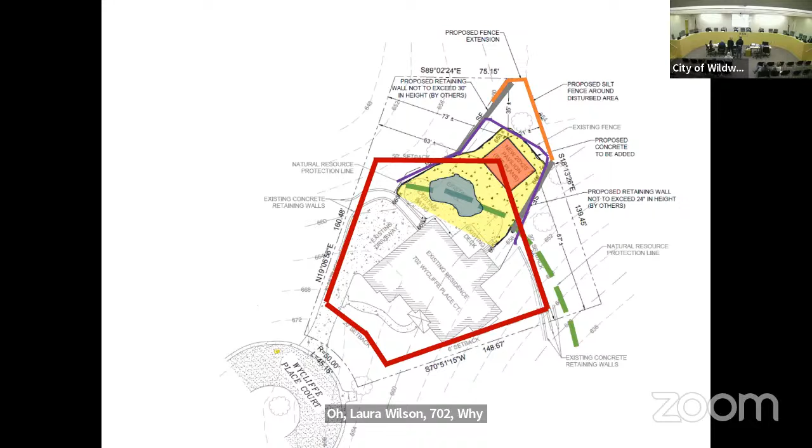Do you solemnly swear that the testimony you're about to give in this cause will be the truth, the whole truth... Just a moment, Courtney.

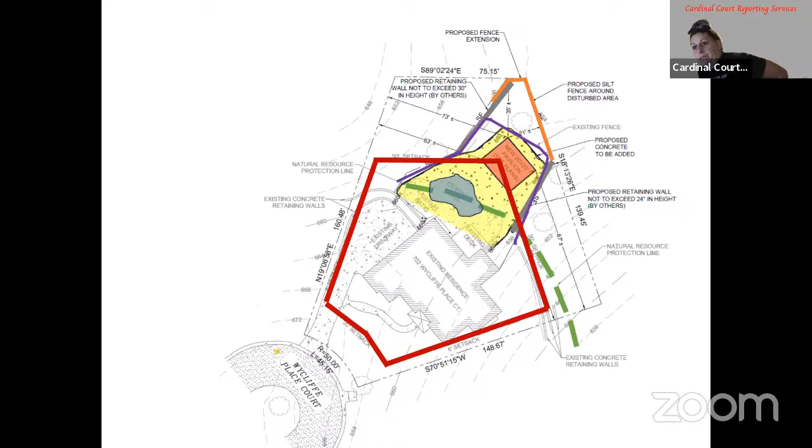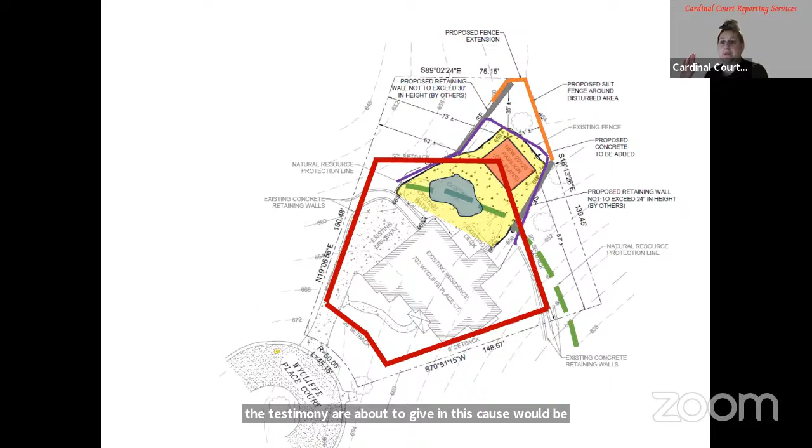Courtney, you should be good to go. Can you hear me? Can you hear me okay? Yes, we can. Please raise your hand. Do you solemnly swear that the testimony you're about to give in this cause will be the truth, the whole truth, and nothing but the truth? Yes, I do. Yes, I do. Thank you.

Mr. and Mrs. Wilson, if you could please explain the nature of the request and the hardship or practical difficulty necessitating the variance as it relates to the character of the property only. Yes, sir. I was wondering, these are some pictures that I took this morning that I was wondering if I could hand out to you all up there, as well. Thank you. And then also on the back of the photos are some letters from some of our neighbors that they sent along as well.

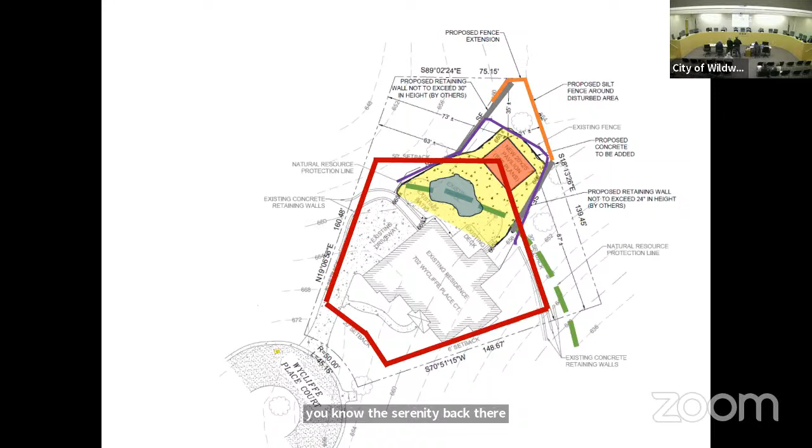Basically, Laura and I have lived in Wildwood for over 30 years. We lived off of Clayton Road in Clayton Spur Court subdivision for about 10, 12 years, and we were the first builders in Wycliffe. The reason we chose this lot was because of the beauty, the woods, the serenity back there, and the privacy. But over the years our family has grown, and we've kind of outgrown our pool deck, and it's really become kind of a safety issue as well.

And we're wanting to redesign the pool area and the pool deck. As you see in the photo here, this is the backyard from this morning; I took these pictures. We are actually not wanting to extend outside of the fence that you see here. We are wanting to keep everything within the fence that is existing right now. The plans you see up here, I believe, were the first previous ones that we had put up with our contractor. Since then we have changed that. I apologize, and if you think it would be best for us to prolong this to the next meeting, to get a new plan drawn out, we can do that if you think that would benefit us as well.

But basically, the stones you see on the pool area here, that's a water fountain, and it's eroding. We're wanting to get rid of that whole area right there, and we're wanting to get rid of the landscape around the pool. We're wanting to move our pool deck, put pool decking around the pool to make our pool deck bigger. And then right behind there, kind of where you see where we used to have our trampoline for the kids when they were younger, that's where we're wanting to put the pavilion, is back there. It's the flattest part of our yard.

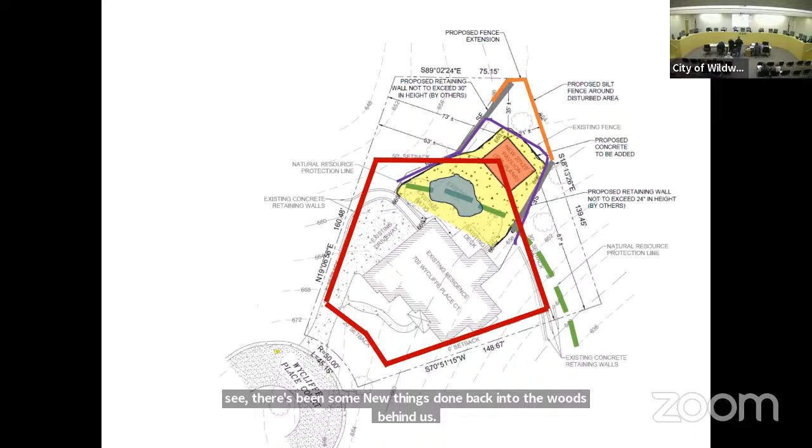As you can see, there's been some new things done back into the woods behind us as well. With this plan, we plan on having a professional drainage company come in to give us the best drainage possible for this project, because that's the last thing we want is erosion. We don't want to cause any difficulties for anybody. We want to make this for our family to enjoy for a very long time.

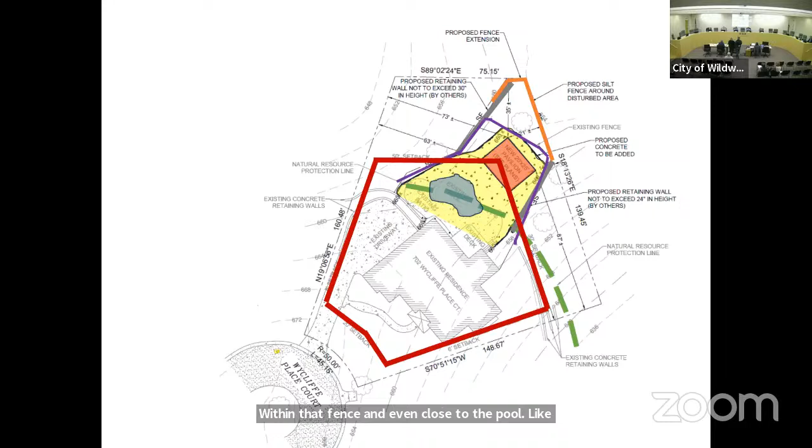So here, the other thing that was not correct is we aren't planning on doing any retaining walls. That pavilion, however it looks, can be within that fence and even close to the pool. We'll do whatever to be able to expand behind the pool, because I wish we had a picture of how much decking we have towards the house. It's not really much at all. So there would be no retaining walls and we would not move the fence.

Interestingly enough, 18 years ago, us being here, I didn't realize it was the natural resource protection line. I thought it was a building line we were dealing with. It evidently was, so you can see it going there. We had no idea that there was a natural resource line. We thought the whole time when we came up for the first time that it was on the actual building line, the boundary line. Not the natural resource line.

But if you do look at this picture, it's disturbing absolutely nothing. We've looked at, with the contractors, a lot of different options. If you go to either side, it drops off considerably. I don't know if you all are familiar with this subdivision, but it's very steep in certain parts. So there really isn't any other place to do it. If there were, we would love to.

Yeah, we're open for suggestions too on this project. And the reason I brought an extension possibly too, we would love you all to come out and see it, to see what it would look like and kind of envision it for yourselves, to see that it's really going to be within our yard here in the whole fence, and it's not going to intrude on the wildlife and the woods behind us. Also, the house behind us, you kind of see where they've done their little thing, but you can't see, there's no one else. No one at all, which is the beauty of it.

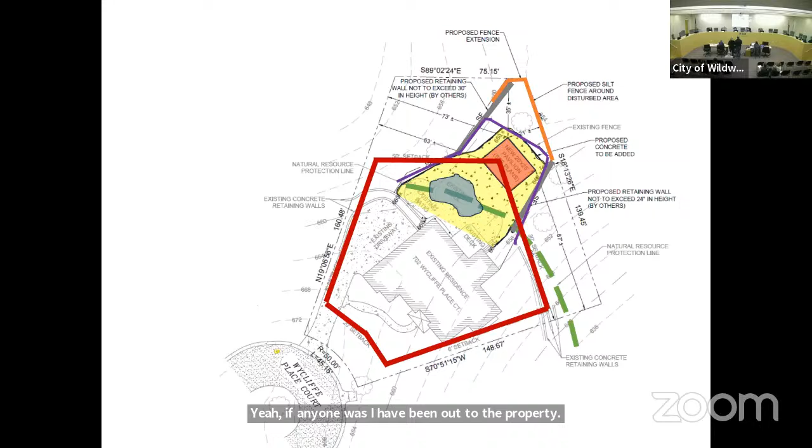Would you, so do you all think that any of you would come out and look at it, and look at the property to see it with eyes on? Yeah, if anyone was... I have been out to the property, and I think I would encourage anyone to go see it. It's a little definitely different than what you see up here, and even in the picture.

One last question. Do we need to sign up for the next meeting, or will it happen automatically? We have a wonderful department that will guide you all. Thank you, good night. Yes, thank you, Ms. Wilson. Keefe will take care of that post haste and does it well.

Mr. Lux, I'll make a formal motion to postpone till the next meeting. Mr. Lux has made a formal motion to postpone to next meeting. Is there a second? I'll second. Thank you, Mr. Sprunger. Mr. Morris, how do you vote? Mr. Lux, Approved. Mr. Sprunger, Yes. Mr. Lee? And I vote yes as well to postpone this to the March meeting.

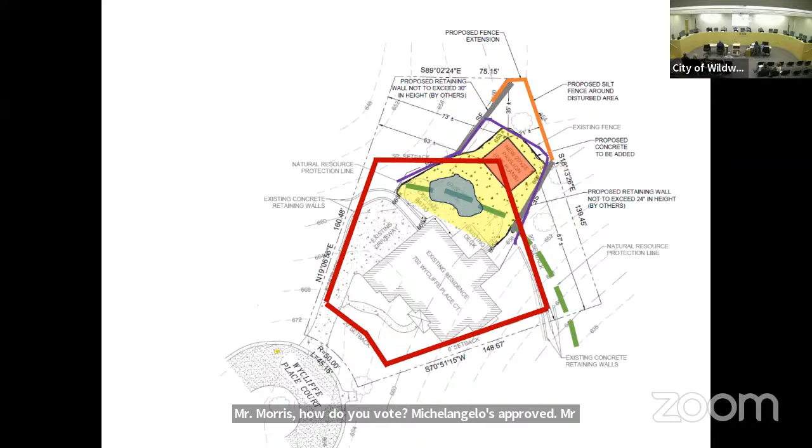At this time, we'll move right along to the next petition. Will the department please go ahead with the next petition? And again, to the board members, the director apologizes, as nobody appreciates a postponement, but I think in this particular instance we can obviously get better information and give you something that you can work from.

Thank you. The next item is BA 3-24 Whalen Custom Homes, Inc., 338 South Kirkwood Road, St. Louis, Missouri, 63122, care of Mark Doring, Doring Engineering Incorporated, 4850 Lemay Ferry Road, St. Louis, Missouri, 63129. Request an exception to the minimum yard requirements generally for the purpose of retaining a covered porch, such being upon a property located at 2644 Center Avenue, locator number 24V510034, Wesley Parc Subdivision, Lot 4, which would authorize a front yard setback distance of 19 feet in lieu of the required 20 feet. This request is contrary to the requirements of Chapter 415.140 R3 10,000 square foot resident district regulations of the City of Wildwood zoning ordinance and ordinance number 2706 approved by the City Council on June 13th, 2022. This particular property is located in Ward 8.

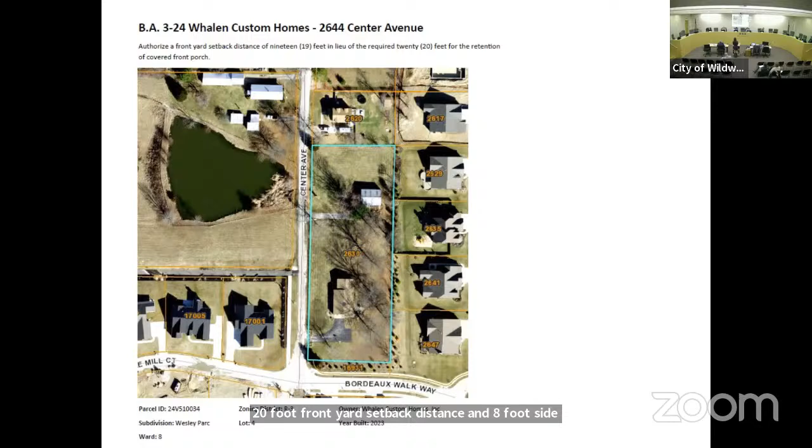That district requires a 20-foot front yard setback distance, an 8-foot side yard setback distance, and a 30-foot rear yard setback distance. The lot is fairly level. In this oval in front of you is the subject of this variance request. This front facade feature of this residence is at 19 feet presently, in lieu of the 20-foot setback required for front yard setbacks in the zoning district.

The petitioner is seeking a variance permitting this 19-foot front yard setback distance. This variance would preserve this front yard improvement as it stands today, rather than forcing demolition or partial removal of it. The applicant notes that this encroachment was caused in part by a misunderstanding of the extent of the new right-of-way associated with the lot. The city recently accepted Center Avenue for maintenance after gaining approval from 21 separate holders of right. This road will be completed or improved in the near future with plans soon to be completed.

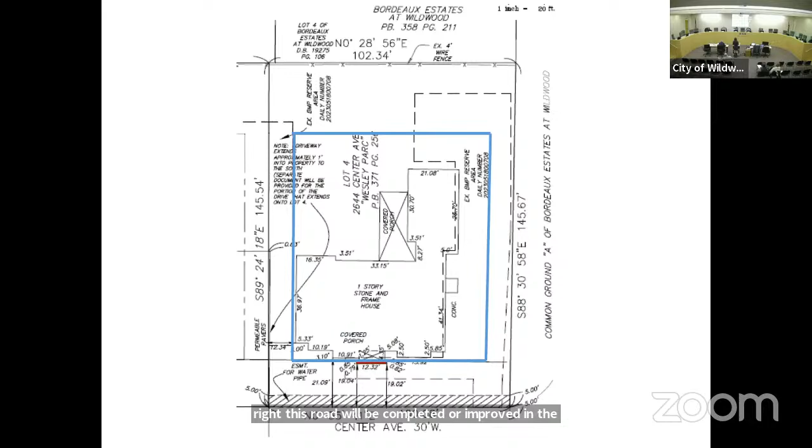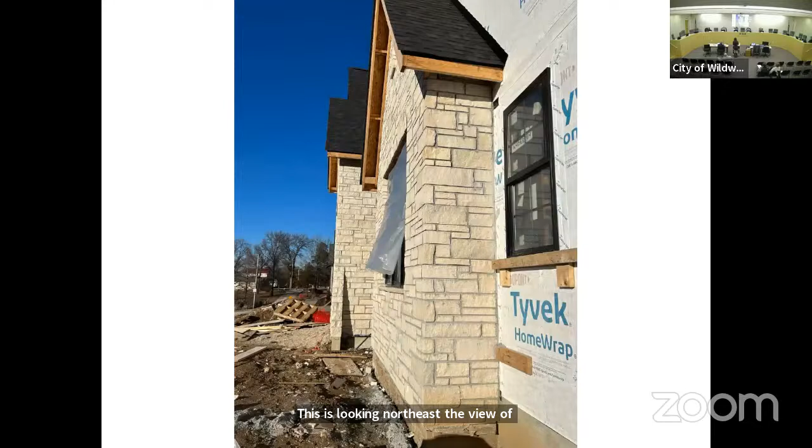This is looking northeast, the view of this front facade improvement. This is looking north of that facade improvement. This is looking north at the street, this is Center Avenue. This is looking southwest at the house across the street. This is looking east, and this is the southern facade of the home. And this is looking southwest where Center Avenue intersects with Bordeaux Walk Way. This is the view of the dwelling in relation to the residence next to it, which you may remember from a very similar variance request in December 2023.

This concludes my presentation. If you have any questions at this time, Director Vujnich and I are available to answer them. Thank you, Ms. Keefe. At this time, will the petitioner please come forward, state his or her name, address, relation to the property, and we'll get you sworn in by the court reporter.

Good evening. I'm Mark Doring, President of Doring Engineering, 4850 Lemay Ferry, St. Louis, Missouri, the engineer in relation to the property.

I'm Jennifer Whalen Bartley with Whalen Custom Homes, representing Mike Whalen, who has laryngitis, in relation to the property. I'm with the developer, with the builder.

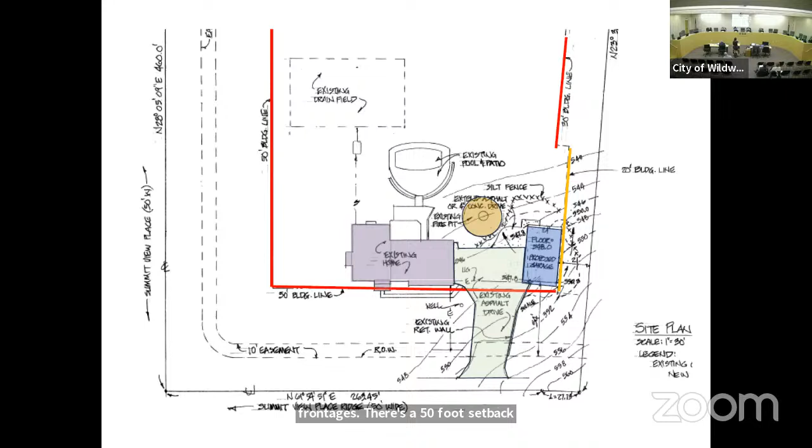I did want to note, because there are two frontages, there's a 50-foot setback line from Summit View Place Drive, and there's also a 50-foot building setback from Summit View Place Ridge.

This is the front of the home looking southeast. This is looking southwest along Summit View Place Ridge. And this is looking northeast at Summit View Place Ridge, where it intersects with Summit View Place Drive.

This is across the street looking north. This is looking southwest at the neighbor most affected by the proposed improvement. A letter of support has been received from that neighbor. This is the view of the existing attached garage, currently undergoing interior renovation.

This is looking east at the rear yard improvements that currently exist, including the fire pit area, the in-ground swimming pool, and the upper wooden deck. This is looking southeast. And this is looking southwest towards the garage location in relation to the fire pit and the neighbor.

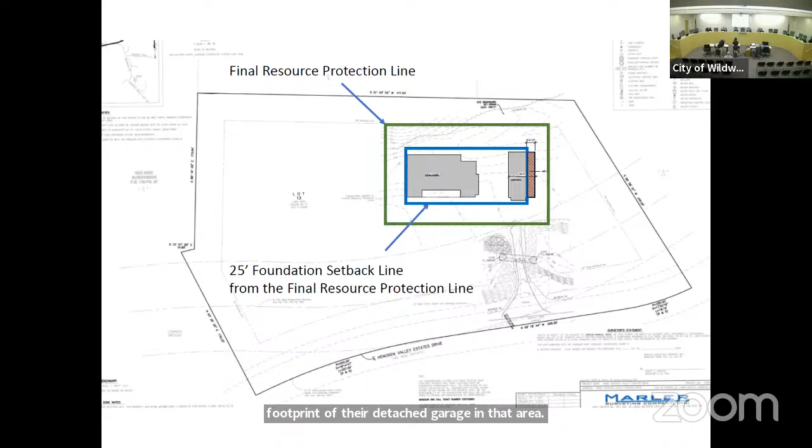Here we are looking east at the entrance of the property, and this is a little closer to that gate, also looking east towards the base of that hill. This is looking north along Hencken Valley Estates Drive. This is looking west across the street, and this is looking south. Now we're standing within the property itself, looking north towards a common ground area. And here we're looking south towards the neighboring property. Here I'm looking northwest towards that front gate.

This is looking north, and this is looking east, again at that base of the hill. There have been 6 approved variances, all within this same subdivision, largely due to some of the difficult topography that exists within it and the nature of the custom home builds within this neighborhood. The department has received 2 written comments in support of the request, including 1 comment located within the neighborhood itself. That concludes my presentation at this time. If you have any questions, Director Vujnich and I are available to answer them.

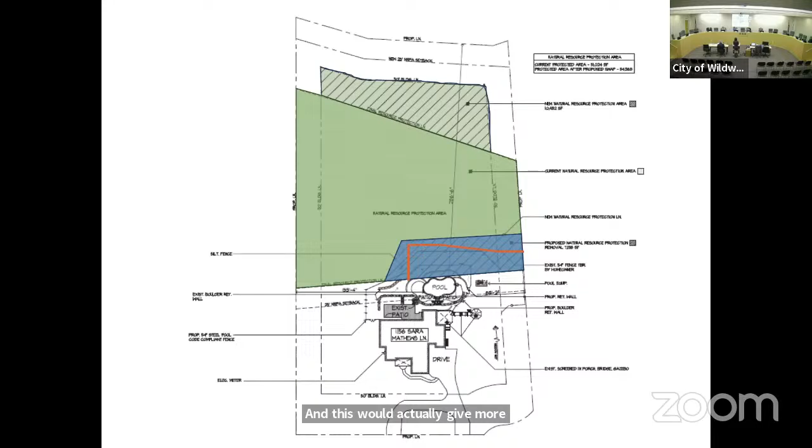This is the front of the home looking east. This is looking at the terminus of Sara Mathews Lane, looking southwest. This is northwest across the street. And this is northeast at Sara Mathews Lane. This is the pavilion structure looking southeast.

This is standing in the rear yard looking west. This is also the rear yard looking west, with the pavilion structure here, and this is the rear of the residence. This is looking southwest. This is looking northeast.

This is looking east into the heavily wooded area. Also looking east into that area. This is standing back at the wood line, looking at the rear of the residence, northwest.

That concludes my presentation. The department has received no public comment associated with this case. No similar variances have been approved in this subdivision, though variances have been approved for other reasons. Thank you, if you have any questions at this time we're available to answer them.